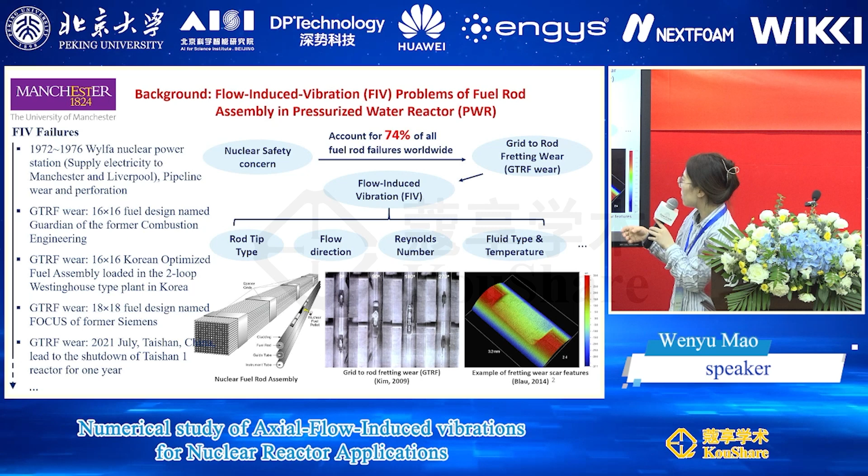I've listed several pictures to show what grid to rod fretting wear is, and you can see the wear features here. In my project, I investigate the effect of rod tip type, flow direction, Reynolds number, fluid type, and temperature - what their effects are on the FIV phenomena.

I'd like to share something about the fluid-solid interaction knowledge. The solid domain, which is the fuel rod, we view as incompressible and elastic solid. The fluid domain - because here we firstly just consider the vibration - we view as incompressible Newtonian fluid and isothermal.

Here is the iteration step for fluid-solid interaction. For the coupling method, we use a partitioned method, which means the fluid domain and the solid domain are computed separately and exchange parameters at the interface. As mentioned before, the software I use is the OpenFOAM toolkit solids4Foam. The turbulence model I choose is the URANS Reynolds stress model, the LRR model. I will explain the reason for this choice in the following slides. In order to save computational effort, the high Reynolds number model with wall functions is used.

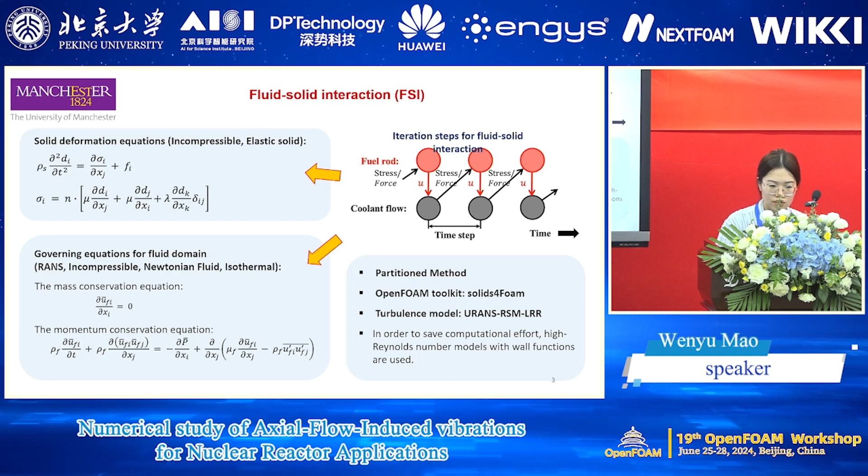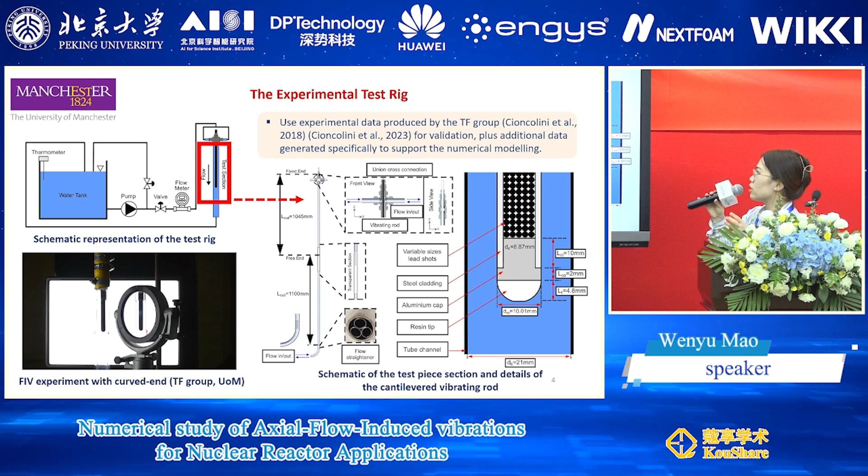Here is the experimental test rig. I will use experimental data produced by the thermofluid group in our team at University of Manchester for validation. Also, some additional data generated specifically were used to support my personal numerical modeling.

You can see the schematic representation of the test rig in our experiment at University of Manchester. There is a water tank, pump, valve, and test section. The water comes from the tank, goes to the tube, and passes through the test section from the bottom to the top, and we also have another flow direction from the top to the bottom.

You can see here is a video recorded by PIV in our lab. You can see the vibration of the fuel rod - we used PIV to do all the recording and post-processing.

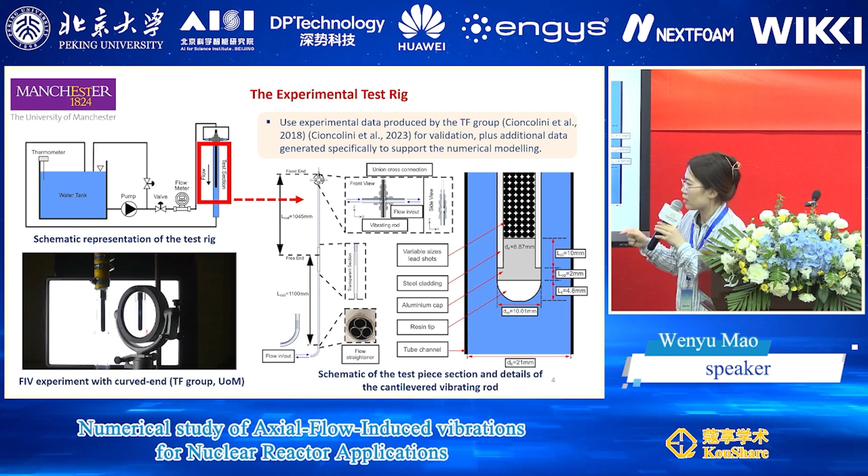As stated before, the turbulence model I use is the Reynolds stress model, the LRR model, and here's why I made this selection. I did a turbulence model assessment comparing the eddy viscosity model, the K-omega SST model, and the Reynolds stress model, the LRR model. The displacement difference was around 200 times. This case takes the upflow, 16.8 thousand Reynolds number, as an example - you can see their displacement difference has a 200 times difference.

That is because the Reynolds stress model doesn't have any assumption. It derives the transport equation for the Reynolds stress tensor directly from the Navier-Stokes equation instead of using any assumption. So that's why it has more equations and can provide better results than the eddy viscosity model.

Also, this one is only 16.8 thousand. I have a list of the cases, like 20.7 thousand, 36.4 thousand, and the difference would reach like thousands of times between two turbulence models.

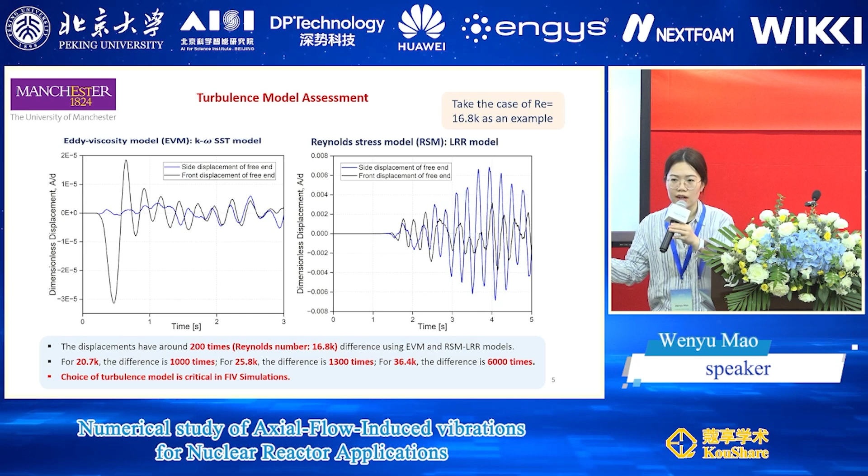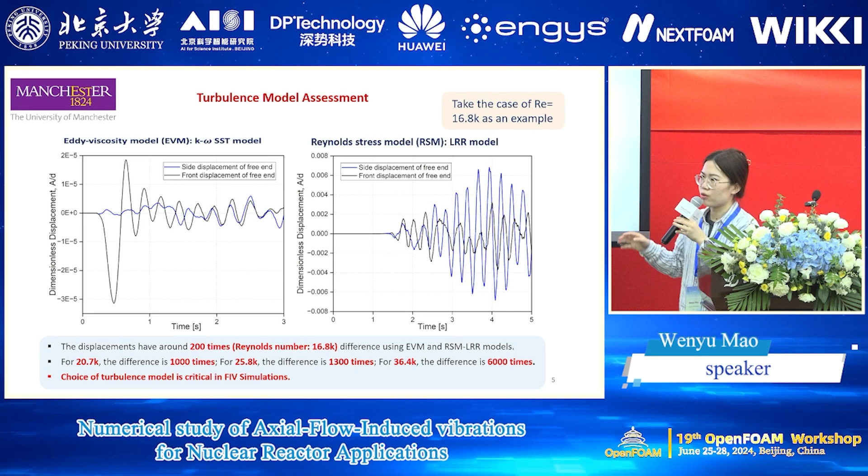Somebody may ask why you choose the URANS model, not the LES. That's because even the 5-second data I produce needs like 16 cores in HPC, run for 4 to 5 weeks, because it's a two-way FSI. It solves the fluid domain and does the iteration in their interface. So that's time consuming. That's why we choose URANS, not the LES.

And the most difficult part here is the vibration of the fuel rod is purely excited by the flow. There is no external force, no human force, no initial force. Just imagine it's steady flow at first, and then it becomes unsteady just because of flow-induced vibration. This process is difficult to simulate.

Actually, in our large project, we also have some teams from research institutes in Europe. They also tried to simulate it using Star-CCM+ or ANSYS, but their conclusion is they simulate no vibration. So that's why our team uses OpenFOAM.

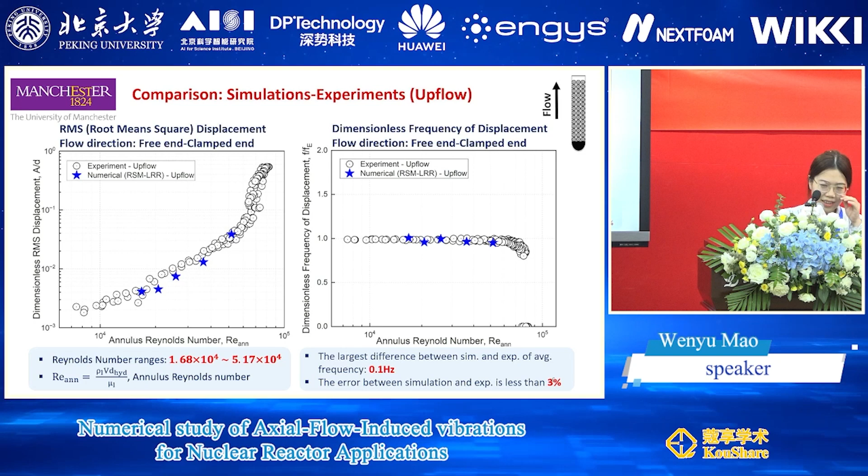It's more flexible to help you do all the settings, edit all the settings. And finally, we simulate it, and it can match with the experiment very well. I think that's why OpenFOAM is very essential for our researchers.

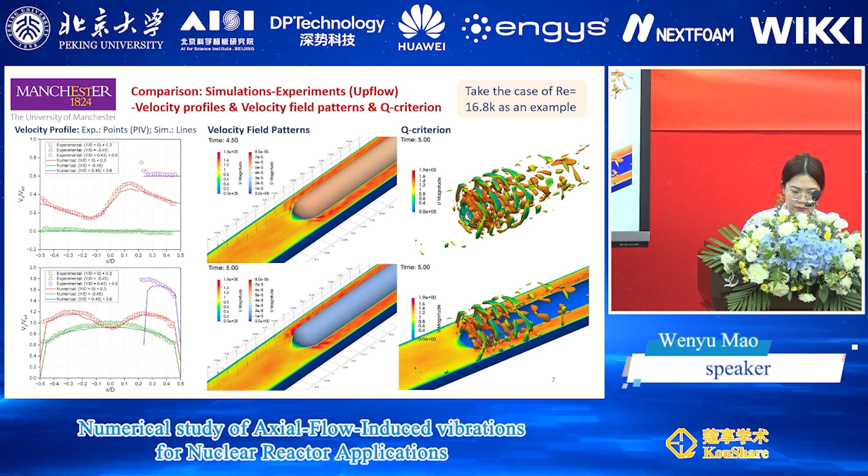There is a video. You can see that for the upflow, Reynolds number 25.8 thousand, the URANS model, Reynolds stress model, LRR model, solved using OpenFOAM, you can see how the velocity field changes along time and how the fuel rod vibrates along time. The color of the fuel rod represents the displacement.

You can see the displacement is small, but it's relatively small. But when we change the flow direction, you can see very obvious vibration. That's why we do some investigation on the flow direction.

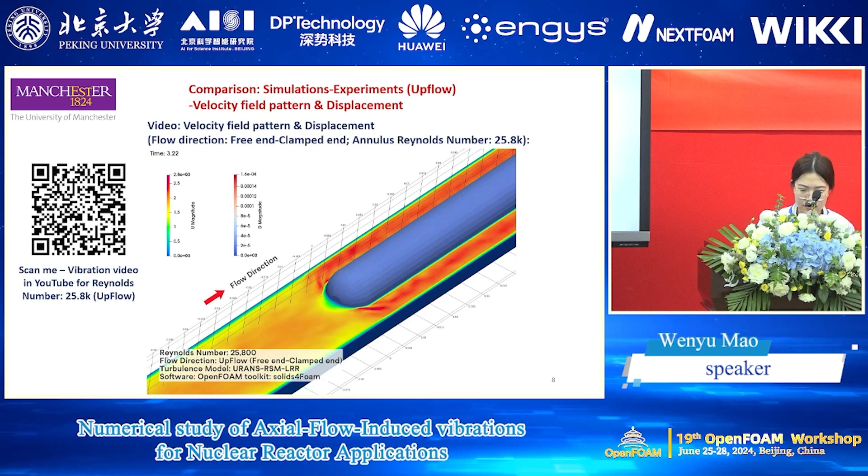Here, another flow direction, the downflow, which we change the flow direction from the fixed end to free end. The red points are my simulation results. The black points are from our experiment. You can see the middle points match well with the experiment.

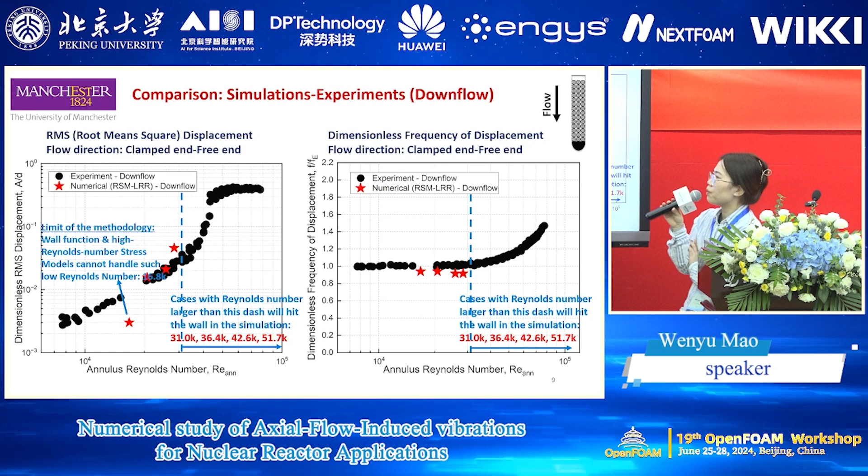The first one, the amplitude is just half. I think the possible explanation is the wall function and the high Reynolds number stress model which I employ cannot handle such low Reynolds number, which is 16.8 thousand.

And we meet another problem that when the Reynolds number is larger than 31,000, in the simulation, the fuel rod will hit the wall and it stops. Just imagine when the fuel rod in the experiment vibrates, when it hits the wall, it will continue. But in the simulation, when the fuel rod just needs to touch the wall of the tube, the mesh becomes so distorted that it will stop automatically.

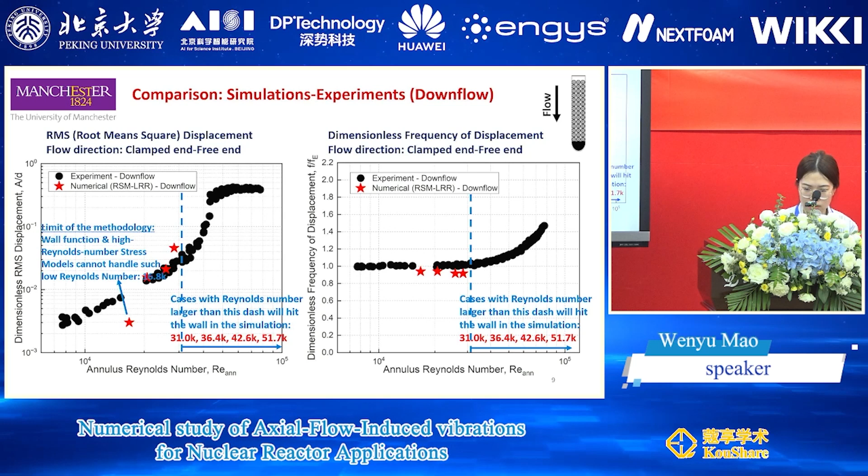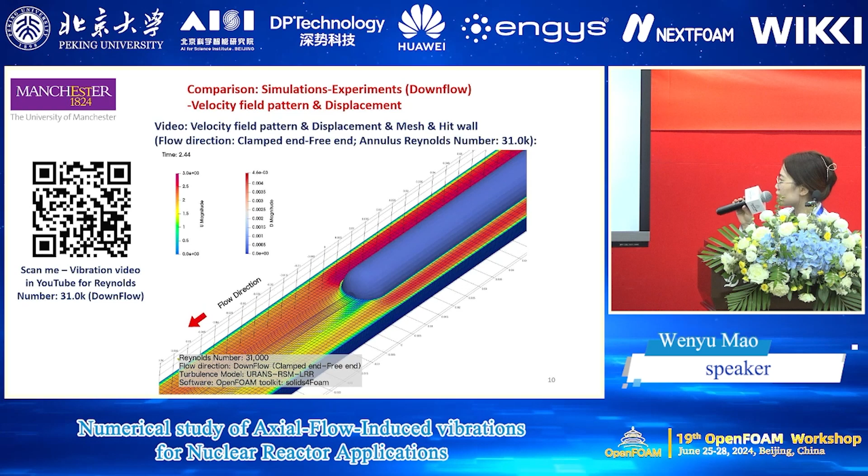It's a video for the fuel rod vibrating in the downflow. You can see the obvious vibration of the rod. Just imagine it's very steady flow at first, just because of flow-induced vibration.

Just because the coolant flow passes by the fuel rod, it vibrates a lot and causes the crack of the fuel rod and even the nuclear fuel leak. So that's why we care much about this phenomenon.

You can see the vibration is obvious, and the color of the fuel rod represents its displacement.

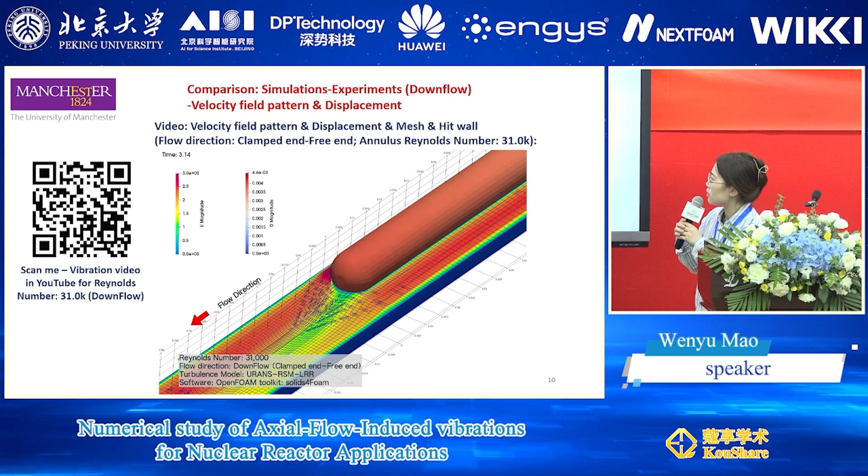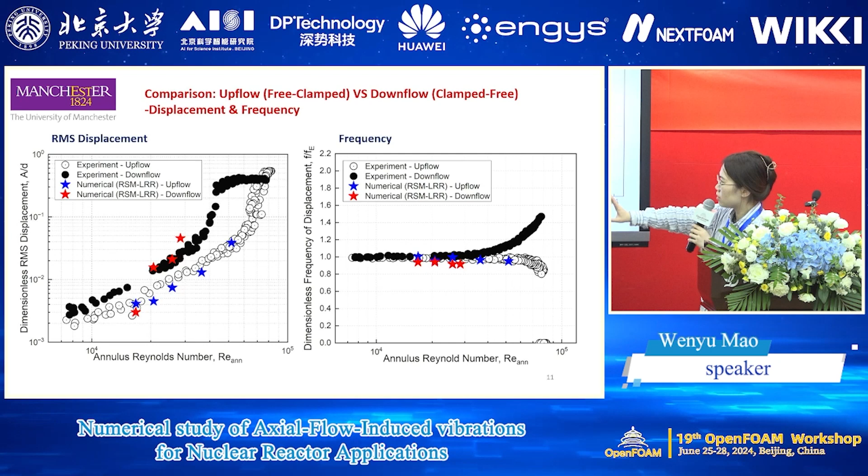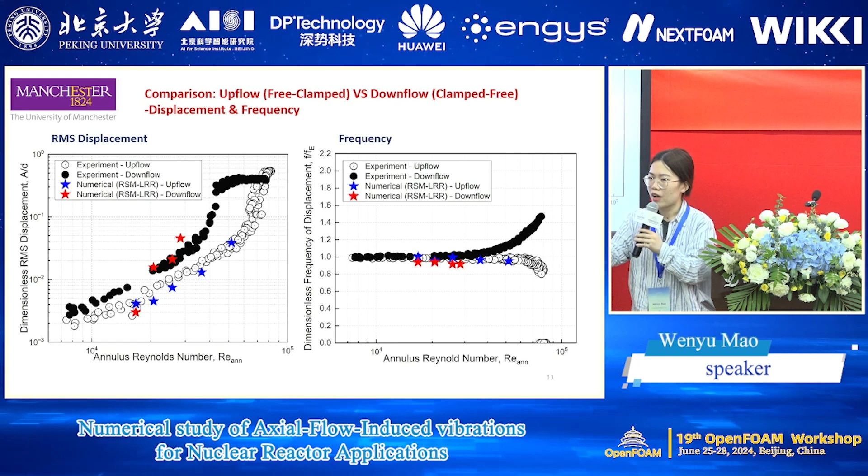So why do we do this flow direction research? You can see the left one is the displacement comparison for the upflow and downflow. The right one is the frequency. Frequency always matches, but the vibration amplitude is what we concern the most.

Even under the same Reynolds number, meaning the velocity is the same, we only change the flow direction, and the vibration amplitude will differ 2 to 10 times. That's a very exciting finding, and it can instruct the nuclear company to do some improved design on their future design.

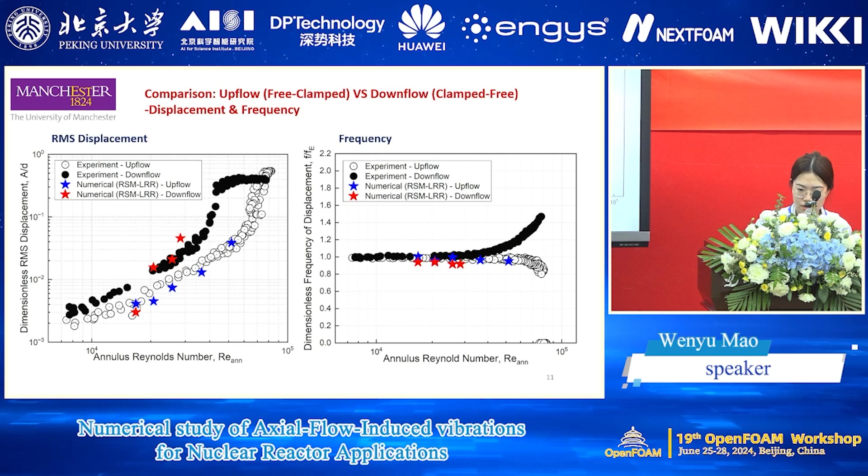Then I'd like to do the dimensionless parameter study. What is this dimensionless parameter study here? The dimensional analysis suggests that the dimensionless root mean square displacement depends on two dimensionless groups, which is the Reynolds number, and another dimensionless parameter.

A couple of recent studies refer to this as the Cauchy number, but that's just in aerospace studies, aerospace engineering. In our nuclear engineering, my study first investigates this dimensionless parameter and finds out its effect on the FIV phenomena.

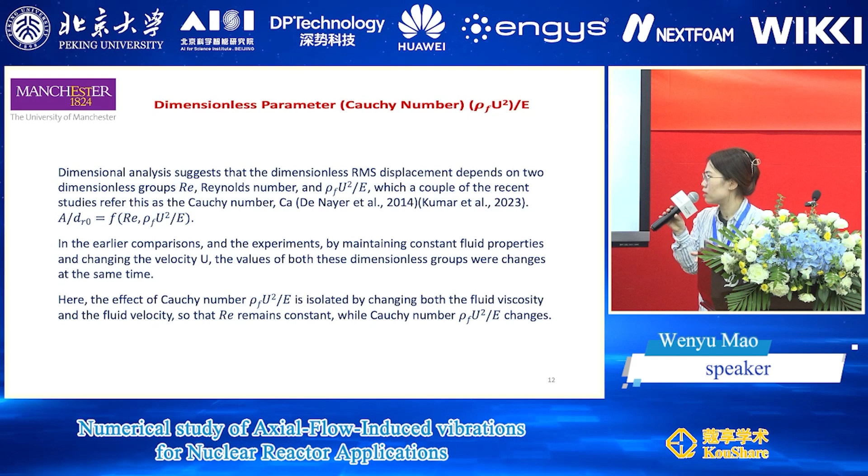In earlier comparisons and experiments, by maintaining constant fluid properties and changing the velocity, the values of both dimensionless groups will change at the same time. Here, the effect of the Cauchy number is isolated by changing both the fluid viscosity and the fluid velocity, so that the Reynolds number can keep constant while the Cauchy number changes.

Then the exciting finding is the vibration amplitude has a linear relationship with the Cauchy number.

It's important because in the future, when we change the fluid type or the temperature, many properties of the fluid and the solid will change. We can keep this Cauchy number to be the same. This analysis will help scale the parameters from experimental model to full scale.

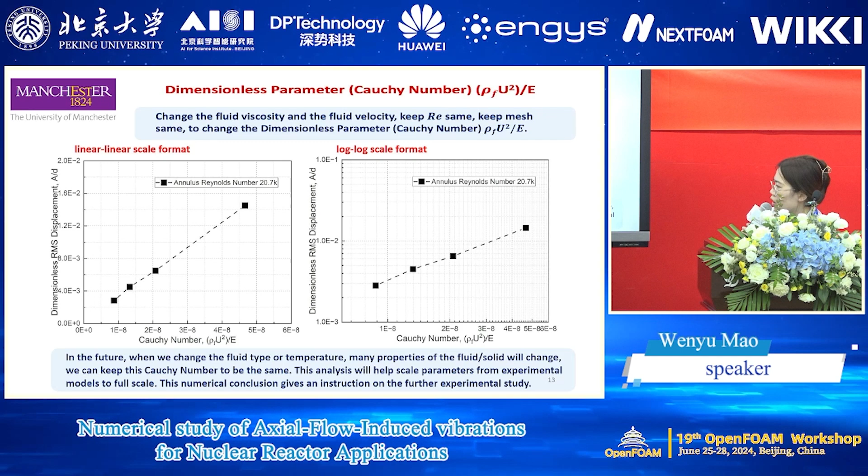So when the fluid type changes to be like molten salt, or the working temperature changes, we can still do this dimensionless parameter study.

And also when I make the Cauchy number to be the same, the vibration amplitude has no predictable relationship with the Reynolds number.

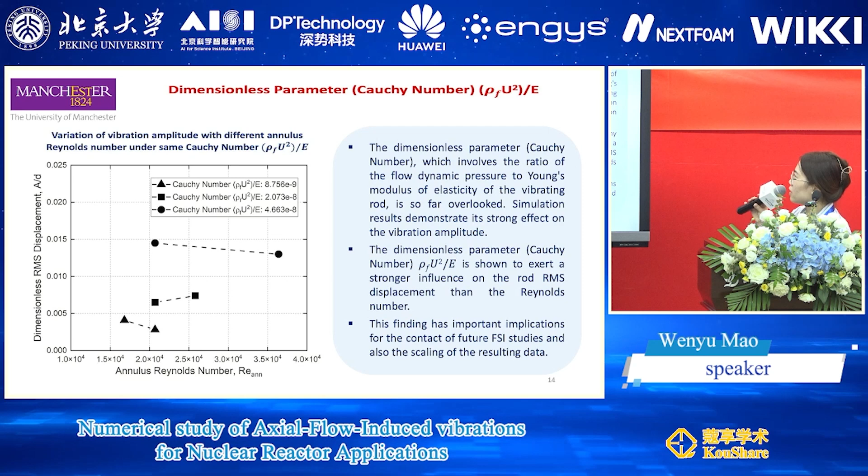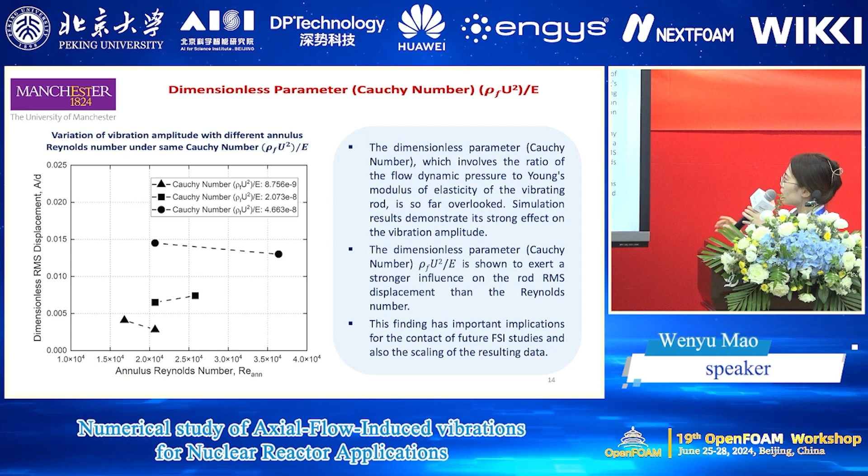So the dimensionless parameter, which involves the ratio of the flow dynamic pressure to Young's modulus of elasticity of the vibration rod, is so far overlooked. The simulation results demonstrate its strong effect on the vibration amplitude, and this dimensionless parameter is shown to exert a stronger influence on the rod displacement than the Reynolds number.

So my conclusion is that for axial FIV, reproducing sufficient unsteadiness is very critical to trigger and sustain the vibration. Then the rod end type at this stage can reach nearly twice, and is related to the difference of the vibration amplitude, and it's related to the flow direction.

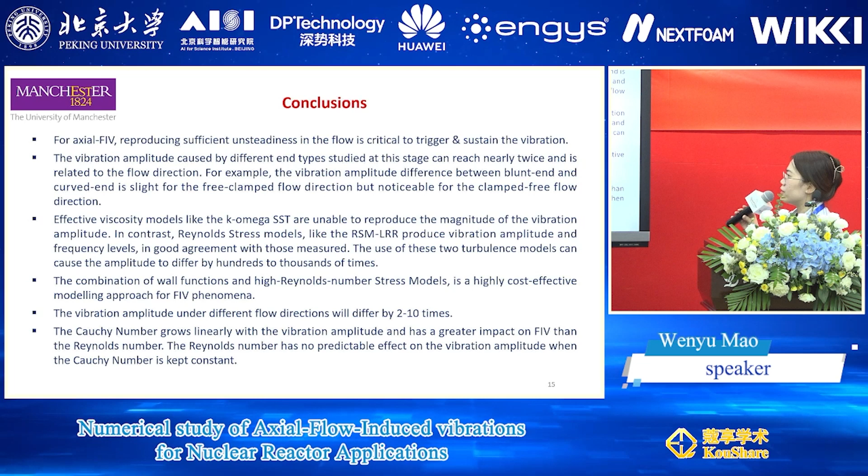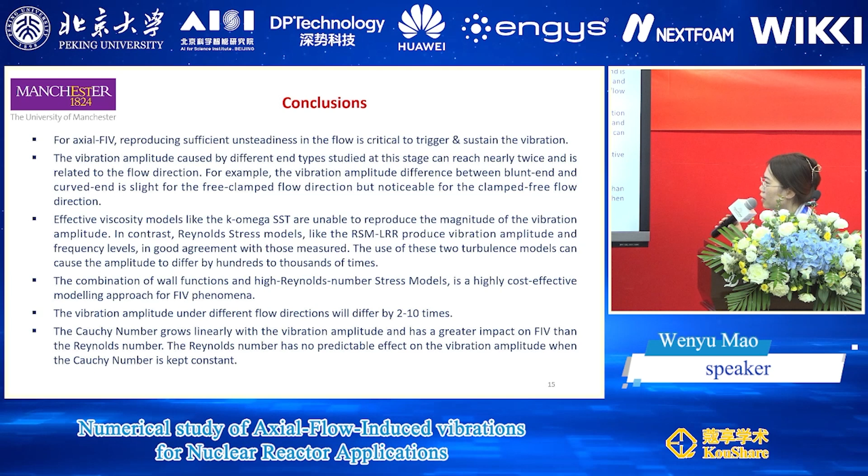The eddy viscosity model is unable to reproduce the magnitude of the vibration amplitude, while the Reynolds stress model can do it. The combination of wall function and high Reynolds number stress model is a highly cost-efficient modeling approach for FIV, and the vibration amplitude will differ 2 to 10 times when you use different flow directions.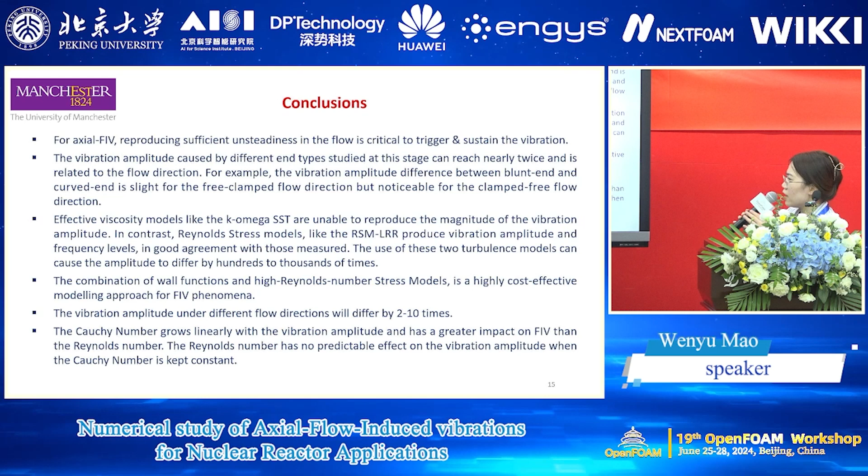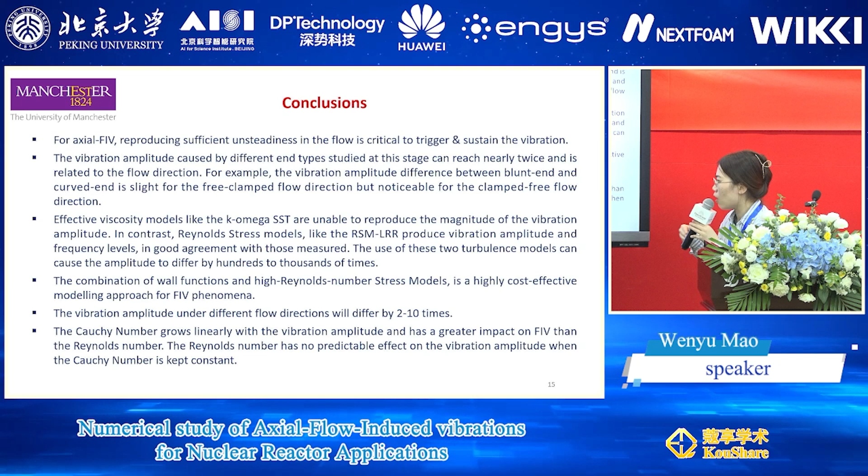And the Cauchy number grows linearly with the vibration amplitude and has a greater impact on FIV than the Reynolds number. The Reynolds number has no predictable effect on the vibration amplitude when the Cauchy number keeps constant.

So the future developments: I will extend the numerical methodology to the multi-rod, also some further numerical exploration into the effect of the rod tip shape. We already have some available experimental result. Also, we'd like to try a robust meshing strategy to address the hit-wall stop issue.

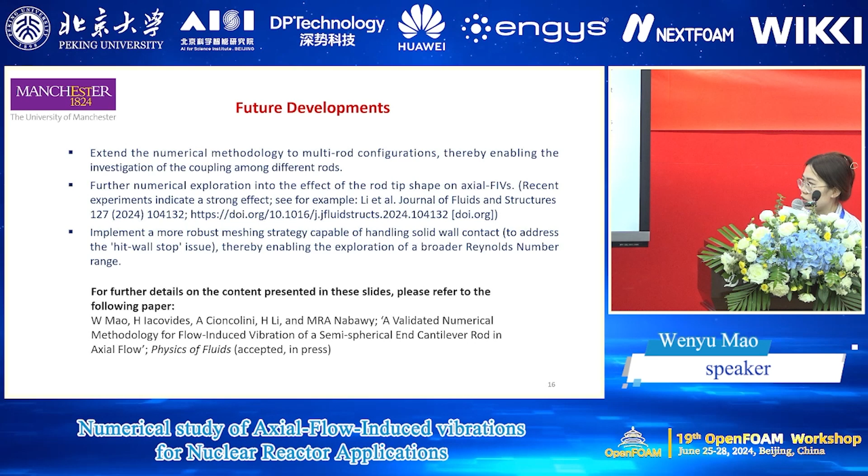Thank you for your presentation, and due to the time, we have time for maybe one quick question if there is anyone in the audience. Okay, if not, I have several questions, but I will postpone them until after the session, because now we have time for the second speaker.

Okay, thank you. I hope to have a little talk with you. Okay, okay, so thank the speaker again.